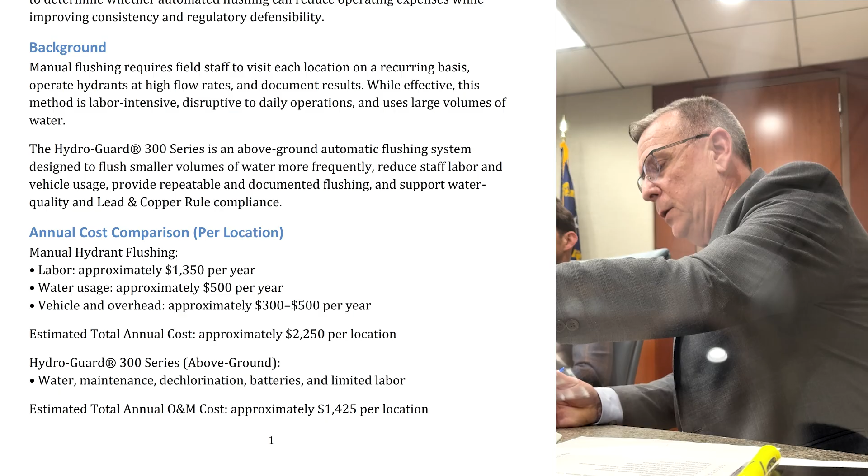You can see we have manual hydrant flushing that lists approximations for labor, water usage, vehicle and overhead. Total estimated annual cost is approximately $2,250 per location. Then we look at the Hydro-Guard 300 series above ground, and the estimated total annual operations and maintenance cost is about $1,425 per location.

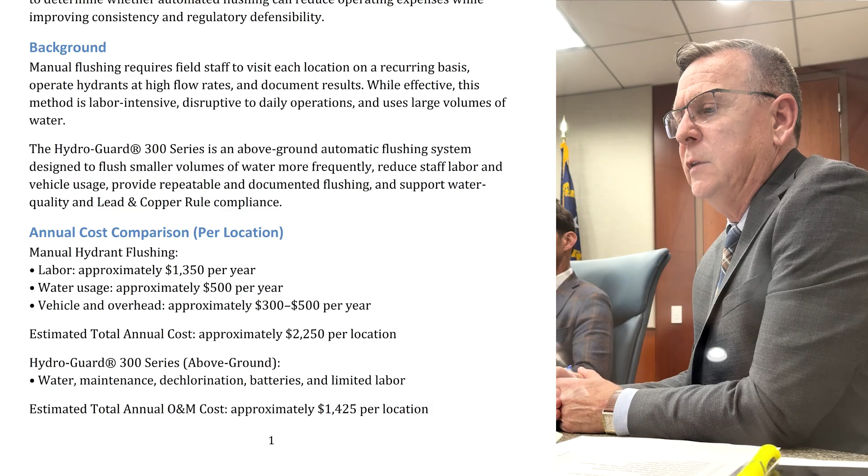So, on page 2 of the memo, page 24, we look at the estimated annual cost savings for these units, which is highlighted. And then we also took a look at our return on investment over a 15-year financial period, approximately the useful life of an auto flusher.

You can see from that information that for our planning and return on investment purposes, we assumed an installed cost of approximately $6,000 per unit. Then looking over the lifetime of 15 years, you look at your manual flushing cost at just over $33,000, and the $21,000 cost for O&M for an auto flusher over that same period.

Operating cost savings about just under $13,000, less our installed capital cost of $6,000. So you net out financially, your benefit is about $6,750 per location, which I think is good, because overall what we're looking at is trying to satisfy water quality and flushing throughout our service area to keep our water quality up.

We're looking to maximize our investment in the ground, and we're also looking to minimize our labor out there on these tasks so they can be doing other things they're responsible for in the utility system.

So we've provided for you a summary statement as well about these units. Over a 15-year service life, each unit provides a net financial benefit of roughly $6,700, representing an estimated 110% return on investment while improving operational efficiency and water quality management.

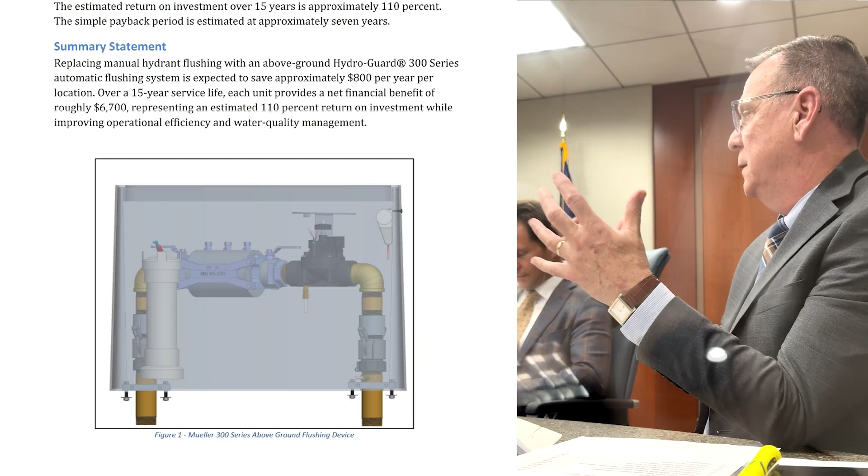Down below, I have a figure to show you a representation of what that device looks like. The gray area around the device is actually the cover—you'd just see a gray or green cover out in the yard. So I might have gone a little overboard with the explanation, but I'm just trying to anticipate questions board members may have regarding return on investment and how these units would operate.

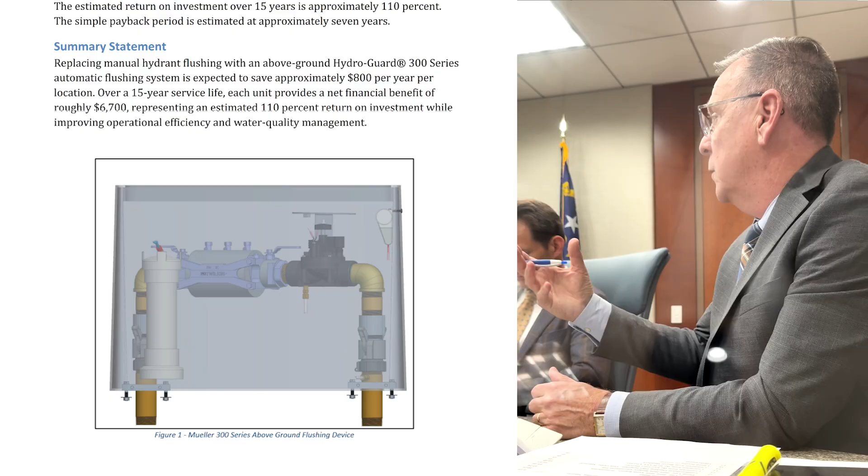And of course, we all know that there's fluctuations in your water system based on demand. So as a development is being installed, you have a lot of these units out there. As you have greater demand on your system, the water changes. Potentially, you might be able to pull one device off of an area based on water quality parameters and move it to another area as well. So there might be some opportunities for that.

So I hope that I've answered all of your questions so far. I just have one more question. How do you know when it malfunctions? It would alert us that it's malfunctioning. Okay, so that's what the Bluetooth is for. That's correct. And also pulling parameters from that, letting us know what's going on at that location and helping us set those parameters well for time of flushing, day of time, those type of things. So, okay, thanks. Yeah, you're welcome.

Thank you, board members. Commissioner? How does it tell you? Do you have a data center screen? I'm not sure if this model actually bubbles up to a website for communications like some of our other equipment, or if it's actually just the Bluetooth where you would drive up near the unit and collect that information as you're driving by the units to get the information that you need.

So I guess my question would be, how would you know when it's malfunctioning? Would it alert you if you're in close proximity and you can pick up on it? Yep. And so that would be based on how often you travel the lines to be able to detect, correct? Correct. Okay. Yep, as far as I know.

Now, I'm sure that they have models that you could port right up to the internet and monitor that as well, like SCADA systems. That wasn't part of the analysis here, but that's something we can get into further, as curious, as how it alerts and how you actually physically know that it's defective.

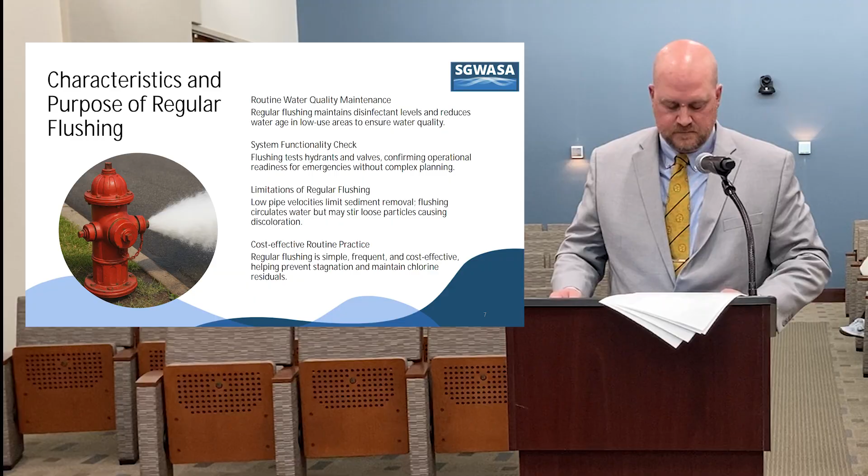So that's regular flushing. Unidirectional flushing involves high velocity water flow through isolated pipe sections to remove stagnation, sediment, and corrosion byproducts effectively.

Unidirectional flushing is exactly what it sounds like—one single way of flushing. Essentially what you would do is close valves and force water to come one way. What it does is pull all the sediment to the end of the pipe and pull it out, as opposed to bringing it through multiple sources and ways, it brings it through one way.

Unidirectional flushing requires detailed mapping and valve operations to ensure controlled unidirectional flow towards designed outlets. The benefits of this unidirectional flushing include improved water clarity, reduced discoloration complaints, enhanced hydraulic performance, and supports regulatory compliance.

There are challenges and considerations though. UDF requires staff training, valve monitoring, and customer communication, but it does offer significant maintenance benefits, which I went through earlier as far as pulling out sediment, also pulling out corrosion in pipes to ensure longer pipe life.

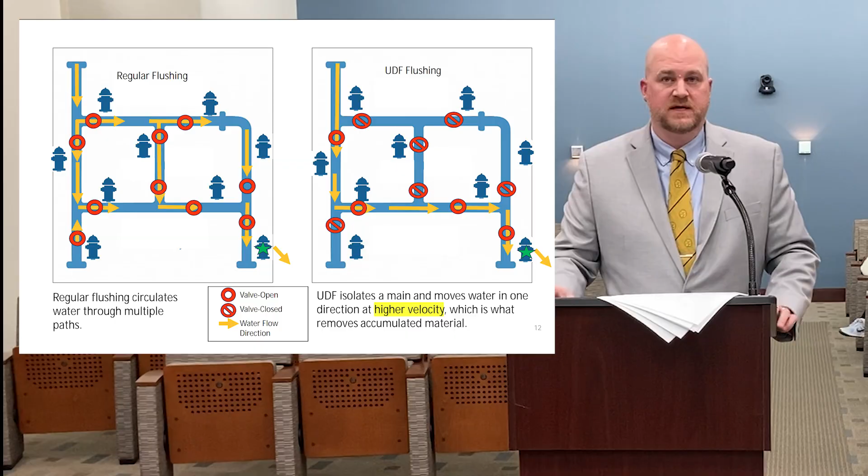The key point we want to make here is there's a lot of ways in which water can move through this specific subdivision. And with us not having done a task like this previously, it's imperative, at least to me, that we strategically do this—we don't just randomly go out and flush certain areas.

We are going and specifically closing specific valves to clean certain pipes here, and we would do this throughout the whole subdivision. It's strategically planned which ones we close to get a certain outcome. Then you go back and open another valve and clean another section of pipe—so value and strategic plan alignment.

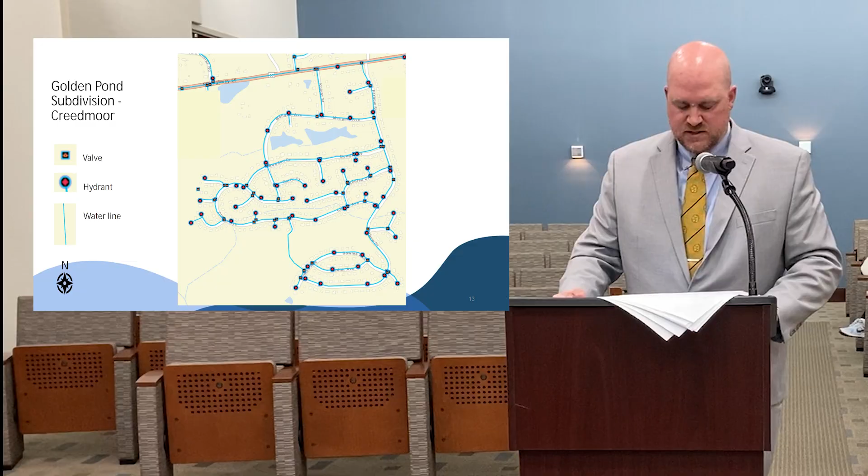Strategic role of flushing programs. This ensures compliance with regulations and supports operational goals by improving water quality and reducing complaints.

The unidirectional flushing program is a direct execution of SGWASA's strategic plan, improving water quality, protecting infrastructure investments, strengthening organizational performance, and fulfilling the authority's environmental and governance responsibilities.

The benefits of unidirectional flushing are: it removes sediment and biofilm, minimizes corrosion risks, and enhances system reliability and compliance. Proactive flushing reduces unplanned maintenance, emergency response costs, and reputational risk associated with water quality complaints.

And resource stewardship: supporting flushing initiatives protects infrastructure, reduces emergency repairs, and safeguards financial stability.

So the executive takeaway here is flushing is essential to maintaining water quality and regulatory compliance. Regular flushing maintains freshness, but unidirectional flushing actively cleans infrastructure. Targeted unidirectional flushing protects assets, reduces complaints, and lowers long-term costs.

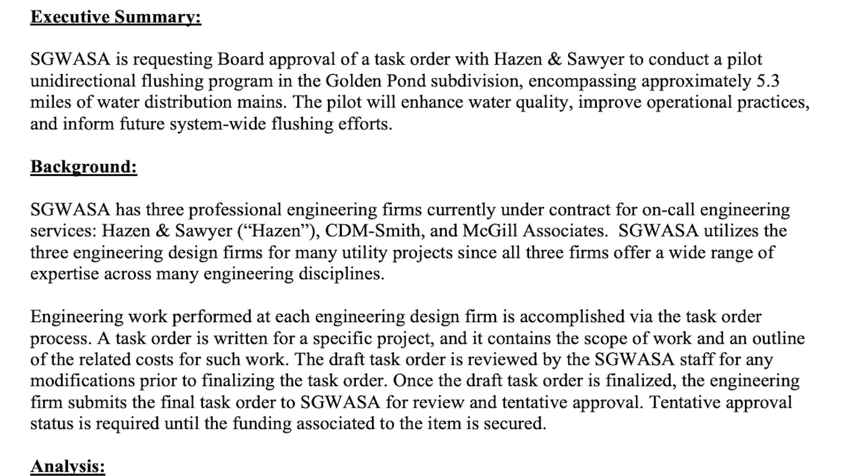SGWASA is requesting board approval of a task order with Hazen and Sawyer to conduct a pilot unidirectional flushing program in the Golden Pond subdivision, encompassing approximately 5.3 miles of water distribution mains. This pilot will enhance water quality, improve operational practices, and inform future system-wide flushing efforts.

Background: SGWASA employs 3 on-call engineering firms for different services: Hazen & Sawyer, CDM Smith, and McGill Associates. We use each of these design or engineering firms for different things, and they all offer a wide range of expertise across many engineering disciplines.

Engineering work performed at each engineering design firm is accomplished via a task order process. A task order is written for a specific project, and it contains the scope of work and an outline of the related costs for such work.

The draft task order is reviewed by SGWASA staff for any modifications prior to finalizing the task order. Once the draft task order is finalized, the engineering firm submits the final task order to SGWASA for review and tentative approval. Tentative approval status is required until the funding associated to the item is secured.

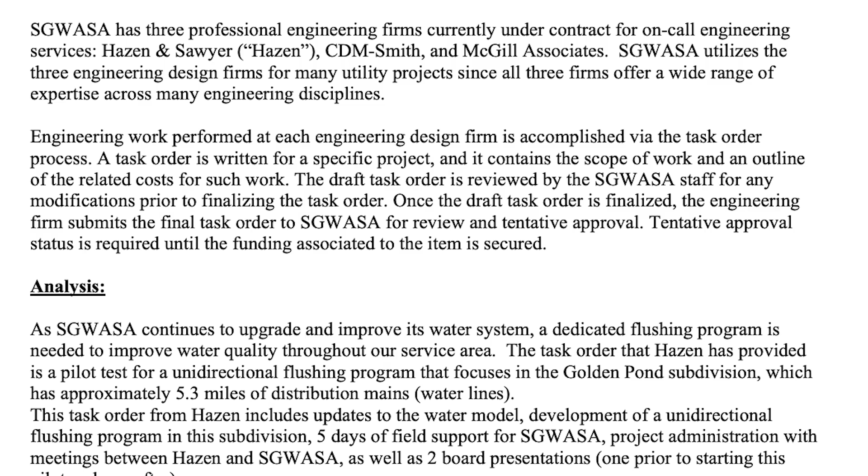Analysis: As we continue to upgrade and improve our water system, a dedicated flushing program is needed to improve water quality throughout our service area. The task order that Hazen has provided is a pilot test for unidirectional flushing that focuses on the Golden Pond subdivision.

This task order from Hazen includes updates to the water model, development of a unidirectional flushing program in the subdivision, 5 days of field support from Hazen for SGWASA, project administration with meetings between Hazen and Sawyer and SGWASA, as well as 2 board presentations, one prior to starting the pilot and one after.

As we continue to upgrade and improve our water system, a dedicated hydrant flushing program is needed to enhance water quality across our service area. The task order submitted by Hazen proposes a pilot unidirectional flushing program focused on the Golden Pond subdivision, which is approximately 5.3 miles of water distribution mains. The task order scope includes updates to the system model, development of a unidirectional flushing program for the subdivision.

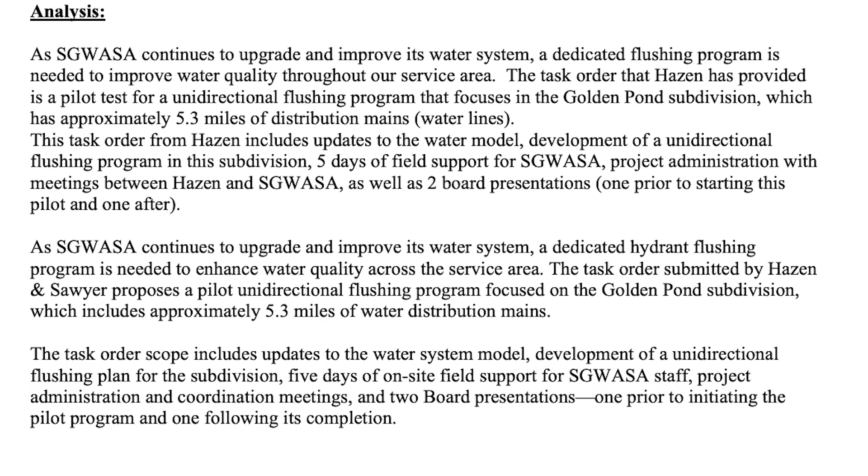Okay, I've already gone through that. But basically, it includes more than just the unidirectional flushing program.

So we will make direct use of this legislative memo. Following the board's review and approval, SGWASA staff will move forward with the next steps in the approval process and schedule this work for spring of 2026.

Based on the results of the pilot program, SGWASA and Hazen will make fine-tune adjustments to the unidirectional flushing program and then plan the next areas to be flushed. So our recommendation is that the board of directors approve the task order as shown in attachment 1.

Schedule: Hazen plans to start work as soon as the notice to proceed is issued. The project schedule will have a draft document 10 weeks after execution of the contract, and final pilot, which would be 2 weeks after receipt of comments on the draft deliverable.

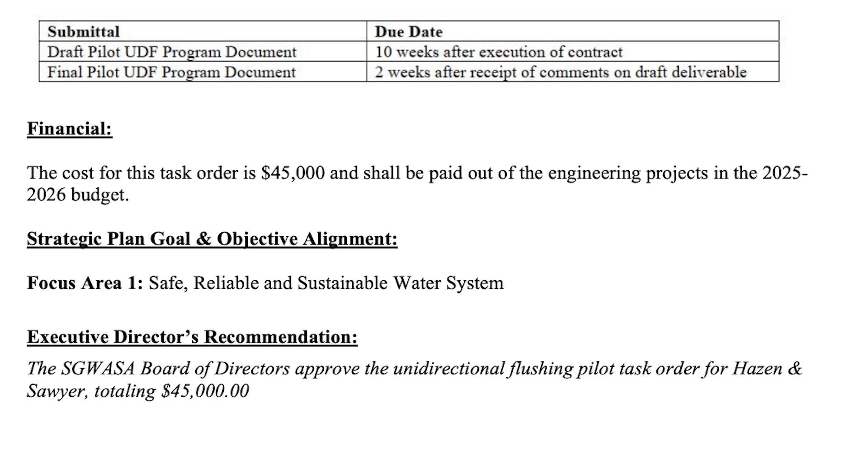The cost for this task order is $45,000 and shall be paid out of the engineering projects in the 25-26 budget. This is focus area 1 of the strategic plan: safe, reliable, and sustainable water system. So our recommendation is the board of directors approve the unidirectional flushing pilot task order for Hazen and Sawyer totaling $45,000. The task order is in front of you as the next attachment.

Okay, who's got questions?

I have questions. $45,000, that's just for the Golden Pond project. So it'll be additional money for every time we do a different project or subdivision? So again, this is a pilot program to help us develop a larger program in the end. So once they train us how to do this, then you guys can run it yourself - is that what you're saying?

No, it's very strategically planned. It's critical to have things like this housed inside a water model, because you know how the characteristics of water move throughout your system. So not only are you closing valves, but it's strategically planned to scour mains and clean for good water quality. But you want to make sure you're pulling water from exactly the places you need to, and see what effects that has on your distribution system. Just because I close this valve doesn't mean I won't end up pulling too much water over here. So that's why it's critical to put this information into a water model to see what it does to your distribution system.